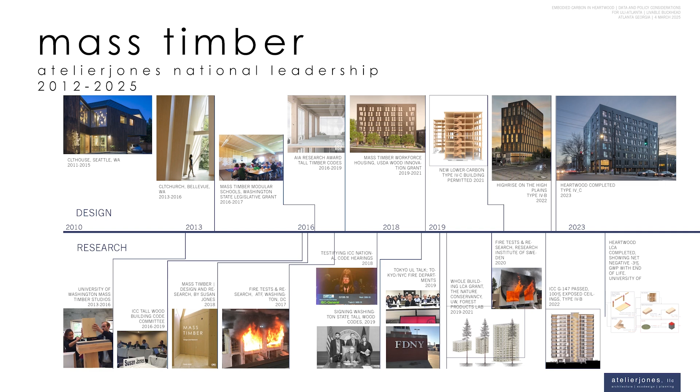Just do it. Building the house we'll talk a little about, in 2011, 12, 13, 14, starting design in '11, building the church, having opportunities, building Heartwood, and then the passion and the ability—craziness, really—to dive into a whole bunch of code changes, which is why I was tapped on the shoulder by AIA International in 2016. I'll talk a little more about that.

This parallel between design and research, building prototypes and then checking your work, has been all about the mark of practice of how people work. So that first prototype—my son there on the right side—was the CLT house.

I didn't know it at the time, but when we came online in 2015, our family lived there for 10 years. Our smaller family, since I have 20-somethings now, and one piece was in Atlanta for the Harris campaign—it was absolutely thrilling to be back here six months ago and be part of that, and then be here as well in a different time, in a different era.

But that family home was one of the first structures in the U.S. made out of cross-laminated timber. So we went out on a big limb.

I spent my own money, and as I told my group today, it cost us 8% more. It was $65,000 out of the total cost of the house. Those were choices I made personally for our family, as both architect, owner, and financer of this process. So that process really accelerated my learning about mass timber greatly in so many ways.

I can't tell you how doing it with your own hands—as an owner-developer, which you all know—really sharpens the learning curve very, very quickly. I'm really proud to say we didn't make any major mistakes, and we did have a couple of years of research going into it, with a lot of partners in that research.

But one of the things that was really exciting to me was the prefabrication. A fellow of ours was talking earlier about how technology has changed in architectural firms. I don't use Revit models myself—I'll show you some of that—but I've got a whole team of people who do them, and they're spectacular at it. Those Revit models have really fed into that prefabrication.

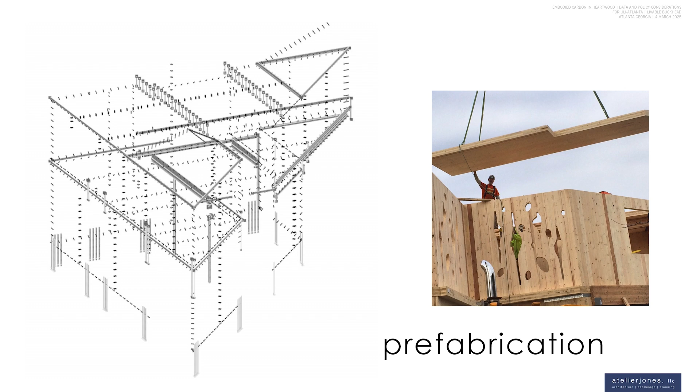Prefabrication works for many materials, but especially—that picture right there is actually the CLT panels we used for our house. They came delivered in little bags, all barcoded and numbered, so the contractor just had shop drawings for each panel at that place. It was pretty phenomenal to see that level of precision and accuracy.

They put up that mass timber in two weeks in the middle of a blustery windstorm and rain—the worst blustery part of December in about 10 years. So that was one lesson I learned: don't put the mass timber up in December.

But that was pretty obvious.

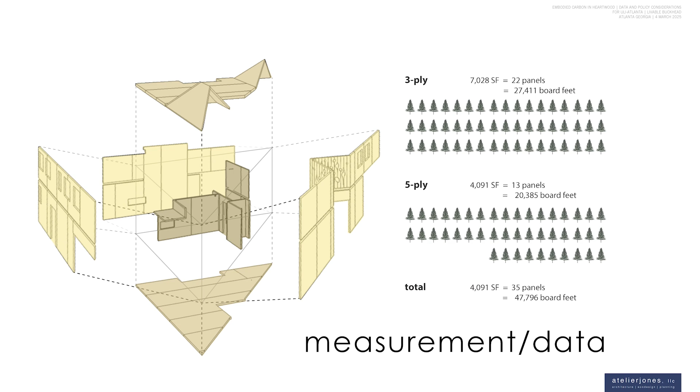It also taught me about how to measure your mass timber, how to measure your carbon, how to define carbon and understand it. It brought me into this whole dialogue that's happening right now here in Atlanta, and it's really exciting. With mass timber shop drawings, you can know the cubic meters, the cubic feet. You can measure that, translate it into board feet, which is a lumber term, and even translate that back to the trees and the acres they came from. That whole circular economy motion was really exciting to me, because architects will often ask: where do you get your materials? How do you source them? How do you specify them so they're lower carbon?

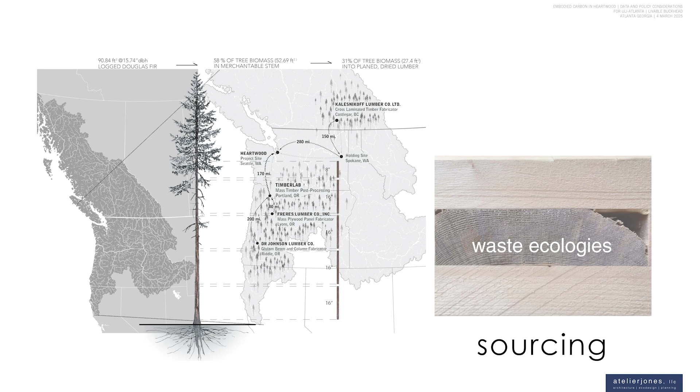And here I'm also being asked, well, how do I know that this actually helps forests? In the Pacific Northwest, there's a lot of social tension about whether we should cut trees down or not. The lumber industry lost the Northwestern timber wars in the 1990s, and a lot of mills were shut down. This is a very active discussion that affects people's families, lives, and jobs, and the health of all our forests, since we all share those values. Part of my question was: how can we think about using forests differently, so it can support rural economies while also encouraging the health of the forests? The dialogue about how healthy forests are so important, and what our role in that is, has been a really interesting part of this.

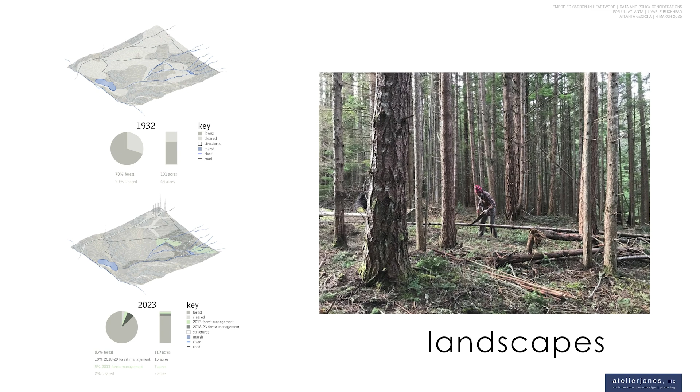This is my husband, I'm taking a picture. It's about 30 degrees up on top of the mountain here, where my grandfather's property is. We take this seriously, we're up there every month or so on top of Orcas, managing my own grandfather's forest, which had gone unmanaged for 6 years. We bring family and friends up there, and it's one of the healthiest things I've done, essentially giving them new life.

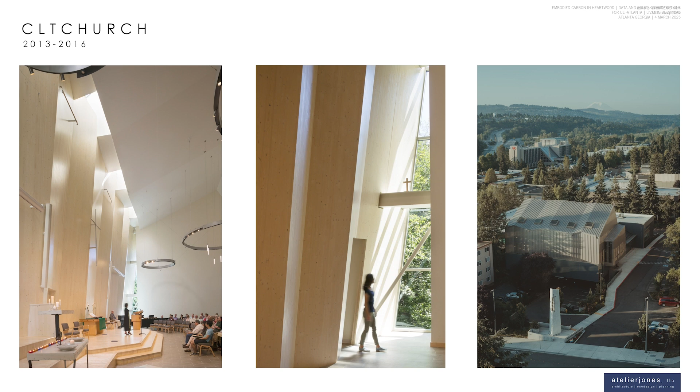Then we had a chance to build the CLT church, which isn't really made out of CLT - it's one wall, set against the sanctuary, structurally supported by steel. So I got to learn a lot about hybrid systems really fast, and this was a delightful project. Two different contractors worked on these projects; neither had done anything super structural before, so we just worked together and made it happen.

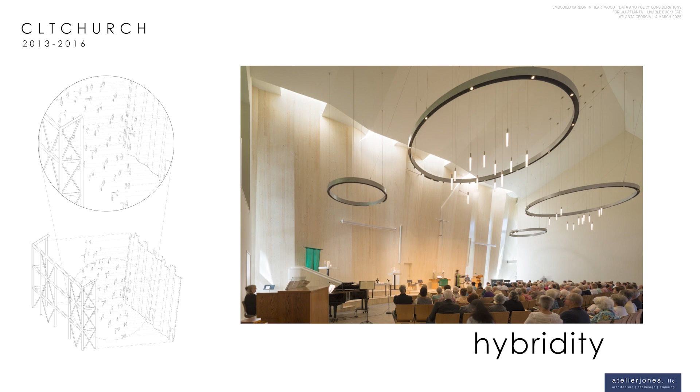In this particular project, the church, there wasn't necessarily an aligned group at first. I showed them renderings of what that wall would look like, and they said, 'Oh good, I think it's great, we'd like to be part of it.' So it was really the qualities of light and space that won them over. Here I also learned a lot about the custom steel needed for those 17 panels of that structure, with the steel seat panels at the front, and that was an interesting lesson in humility.

We weren't doing structural work you'd notice in the space - we were doing what you'd call decorative, because technically it wasn't structural. Say you need 40-foot high panels, 8 feet wide - you'd hardly think of them as powerful, but they were, and they were a key part of the program and the work.

So right around that time, around 2016, I got tapped on the shoulder by AIA National to join this code-writing committee. This really comes back to policy: how this community of architects, engineers, developers, and policymakers can really impact sustainable policy in positive ways. I knew that, but I was saying no to AIA, because I knew it would be a huge time sink and I wasn't being paid for it. I owned my own firm, a small business with 7 employees I worked with all the time, and it was an enormous decision - I said, I can't risk my practice.

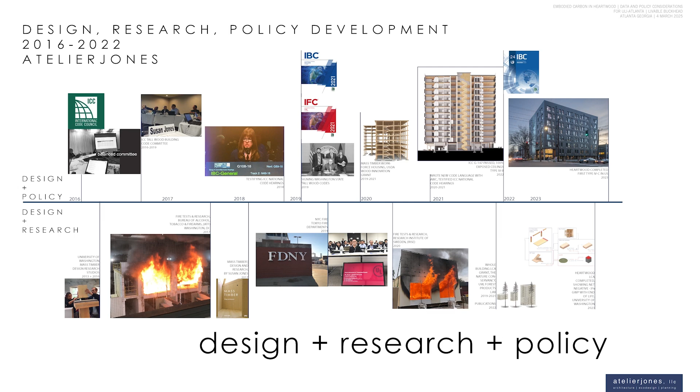Nevertheless, I did stay in the end, after they asked again and again and again. I agreed to go to at least one meeting. When I got back there, it was a little bit like some aspects of this - people on the committee saying mass timber isn't safe, it'll burn up in a fire. Meanwhile, the concrete and steel industries were sitting right there at the table, with their voices heard in a very balanced way.

They were strongly opposed to many of the things we were suggesting, and we had to prove it to them. But concrete is still easy—it was the fire guy. We tried sitting down some 6'9" fire chiefs of Columbus, Ohio, telling them how buildings are going to burn up.

You have to figure out how to break down those silos of knowledge, reach out, understand their perspective, and how they then create science and research, data-based, data-driven, to move to the next level.

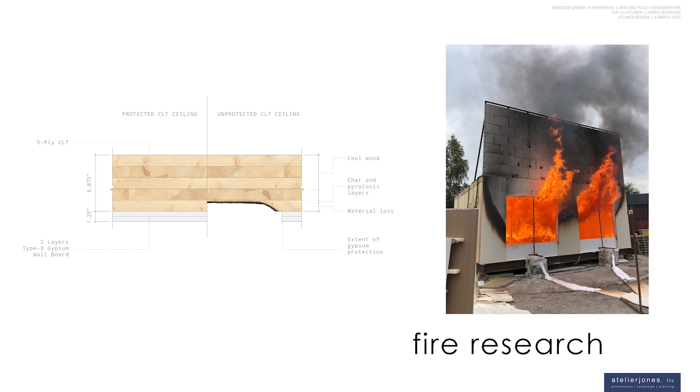And we did fire test after fire test. There were 5 in the Washington D.C. area, in Beltsville, at the Bureau of Alcohol, Tobacco and Firearms. Then in the next code cycle, we did 5 in Sweden, at an outdoor research facility shown here.

What we showed is, I hope you all know, that it's super safe. If you build a char layer in there—a char layer is the layer designed to disappear in a massive fire—then that fire disappears.

The structural layer behind it is preserved, and convinced the fire community of the code committee that this was indeed safe.

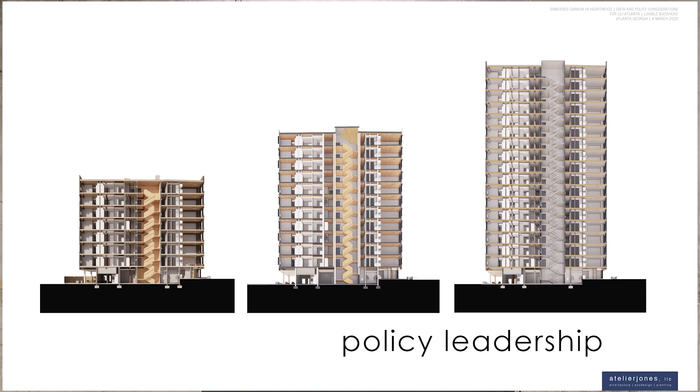So I'm going to talk a little bit about Heartwood now for the rest of this time. This is an 8-story building in Seattle, on Capitol Hill.

We were lucky enough, after finishing this huge amount of work in early January 2019, that I ended up writing a grant to the U.S. Forest Service to help implement one of these and bring it to a client. We brought that grant to a client in August of 2019 after we received it.

It was a small grant, but it was about $250,000, against a $40 million project cost, $28.5 million construction cost—a drop in the bucket to solve them.

But it allowed us to do that upfront, incredibly difficult work of doing a couple of different schemes and comparing costs at a conceptual level. You need not only the architect, you need the structural engineer—in our case, the acoustics engineer and the fire protection engineer—as well as the contractor at scale and the timber factory.

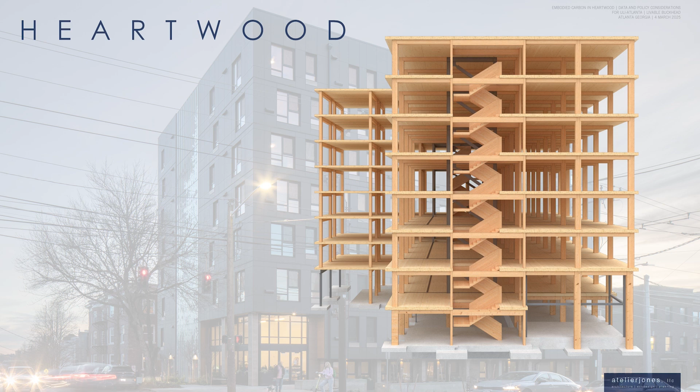Do I say we were cheaper? Do I say we were more expensive? I said similar costs. And when you're in concept design with good developers and your contractor, you know there's a long road ahead of you—so having similar costs at that point is good, compared to if it had come out wildly lopsided.

The project was 67,000 square feet—60,500 square feet, 126 units, 113 studios, 13 one-bedrooms. It was for a non-profit owner called Community Roots Housing, which typically specializes in affordable housing—60% of AMI, the area median income, and lower.

This project was brought in by an outside consultant working with the direct client as workforce housing. She was serving as an advisory board member because they had a lot of land but not enough people to execute these projects amid the frenzy happening in 2019. So she proposed waiving the developer fee, and said we'll do this workforce housing project, meaning we're going to test the system of LIHTC funding.

We're not going to go for housing. Without LIHTC, we're going to go 60 to 120% of AMI, which is still quite high in Seattle, as we've got a lot of influx of tech workers that bump up their AMI, area median income. That's a really key thing to consider.

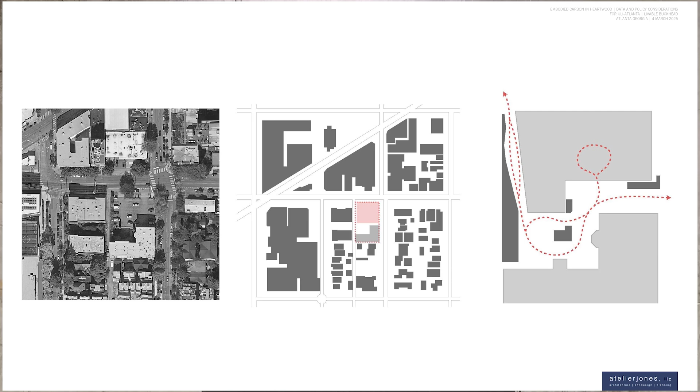So we came in with a lot of community meetings, a lot of outreach, a lot of caring, a lot of listening, and developed a courtyard in between that falls at the development lot line, which really tried to bring the communities together, the workforce housing community and the people that worked there. But they were on the same lot, so we did that lot boundary investment.

Our lot ended up being about 13,000 square feet with setbacks. The footprint is an 8,500 foot site, and we hope it's a very efficient building for most people. I actually needed to run those numbers - I think I ran them at 80%, 4 or 5% per floor, but these are small floor plates at 8,500 square feet, that's 17 units per floor. The ground floor doesn't have a lot of amenities - the amenities are outdoor courtyards and where its location is.

So you all talked about amenities, how important they are in relationship to the neighborhood. We live in this at the height of Capitol Hill - everything's walkable, there's no parking required, and really no parking needed in this particular site. Seattle has very good transit and bus systems, and it's extraordinarily walkable.

I did look at this - it was walkable. I walked over here from the Kimpton Hotel, it took me 20 minutes. I had to walk home on Peachtree Road, about 10 minutes - it was a little bit too painful, but not too bad. The fresh air kind of tried to wake me up a little bit. But walkability is a really key thing, and that's another aspect of what you all are doing in Buckhead - you need it to be intentionally walkable to something.

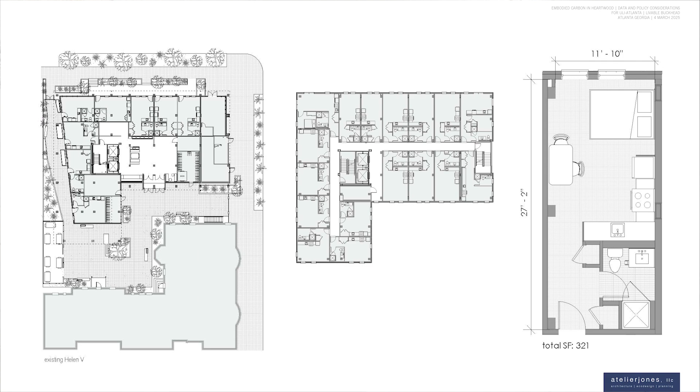It's a simple shaped core with the structure, the steel braced frames - buckling restrained brace frames, I think I got that right. Thank you, structural engineers. It was a steel system that was also pretty compact. There's also another lateral brace down the hall, so we made our hallways small and efficient, and kept our common spaces quite reasonable.

This is a picture of the structural system with the lateral bracing in between, and all of the steel is shown in that black and white drawing. All the wood is on the right hand side with the brace frame placed up. You can also see what we did, and I'll show you some pictures later with the deck.

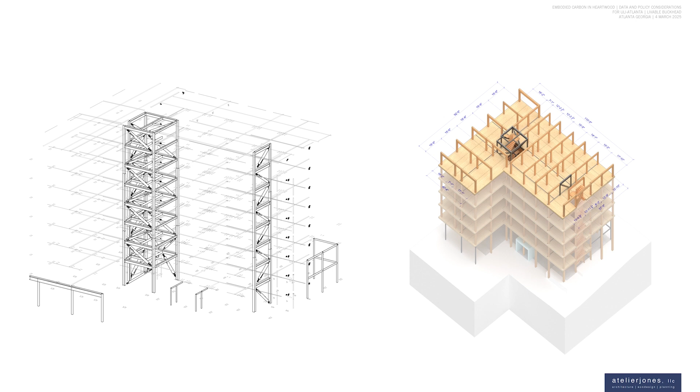I'll show you some evidence of that in new construction. These are some renderings that our office did on the left, and then the final on the right. As for the structural grid, we did not have a single structural grid.

We had a 12-foot-2 grid and an 18-foot-8 grid, and the reason is because we weren't designing to the optimal structural grid for the structural engineer. We were designing to the pro forma, and our pro forma told us that we needed more units.

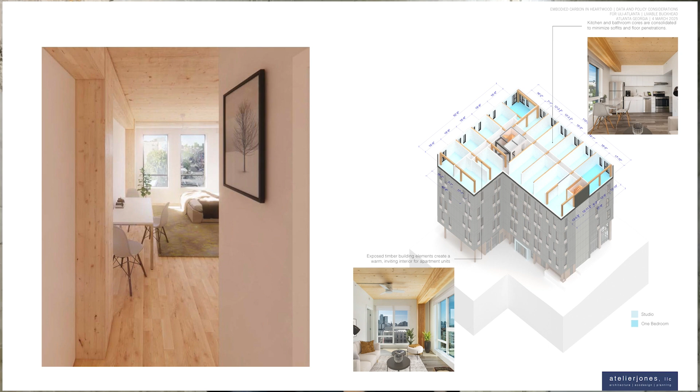The more units we got, we put the trash underground, we put the electrical transformer underground, and we fit in as many units as possible. We had a very small site, and we designed that capability to work with the system. That was what really made it work.

As the pro forma told us in the first week, this was not enough. We needed 115 units - okay, we got it right. Oh, we need 6 more. Okay, we got 121, we'll need 5 more. 126, okay. That was the kind of attitude of the project, knowing that Mass Timber is difficult.

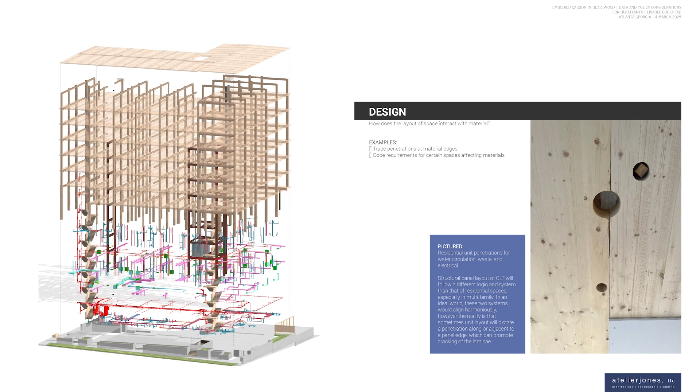I mentioned this a little bit about the BIM coordination model - this is from the individual in our office. It's not a Revit model, but the excitement about moving all of these things together in our hands was very extraordinary. I was able to use that BIM coordination.

You could see the holes on the right-hand side there and how those vertical systems went into place. All of those holes, all those panels, were drawn in place beforehand.

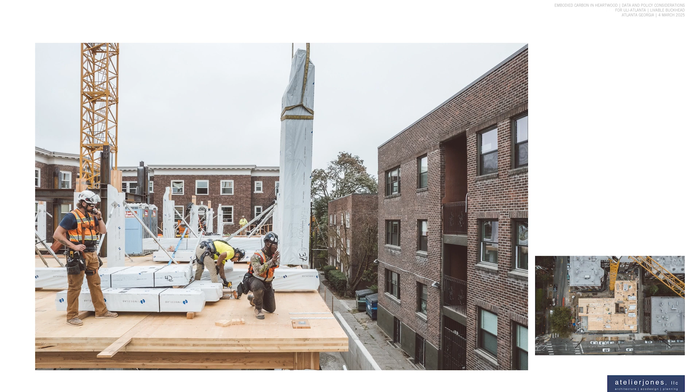Under construction, what does a tight site do for you? You've got a really tight one here, and we had just-in-time delivery. There was a little swath of a place where a flatbed truck could come up and put that timber down.

The timber went up before - it was frankly the easiest thing about the job. The tight site was a challenge. You can see the crane in the background, in that courtyard.

We had to have everybody out of the brick building when we were taking it down, in case there was some kind of a tragic accident. So we had to move 37 households out of their brick building homes in one weekend. Not a real fun thing for people to afford, but it was necessary because of the urban qualities of the site.

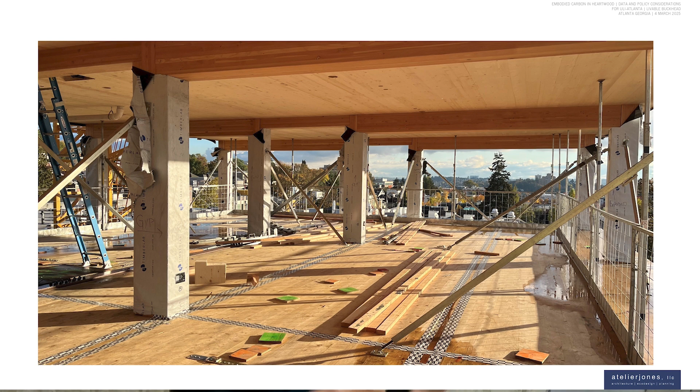You might notice the beams aren't quite in sync, and that's because we're trying to be most efficient with the fire dividing walls that go in between units, but we didn't really care that much. This was a design concession I made between how deep the beams were in one unit versus another, because people aren't going to go back and forth.

We were able to save some dollars there, and save some fiber as well in that piece of the process.

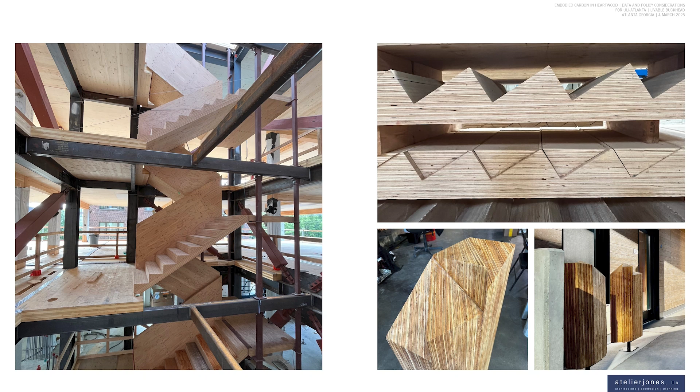There's a picture of the core going up. We were using Mass Plywood Panel stairs because of their strength - we had a stringer that went from floor to floor, and another stringer from floor to floor.

On the right-hand side, you could see in the CNC factory - Timberlab in Portland - how that CNC cutter just cuts out those treads. That's a fabulous thing because you're able to create these art pieces down over the pedestrian walkway areas with the MPP stairs and the stair treads.

We were able to use that waste again. Those stair treads went up simultaneously with the core, simultaneously with the steel, and simultaneously with the broader Mass Timber columns across the stair floors.

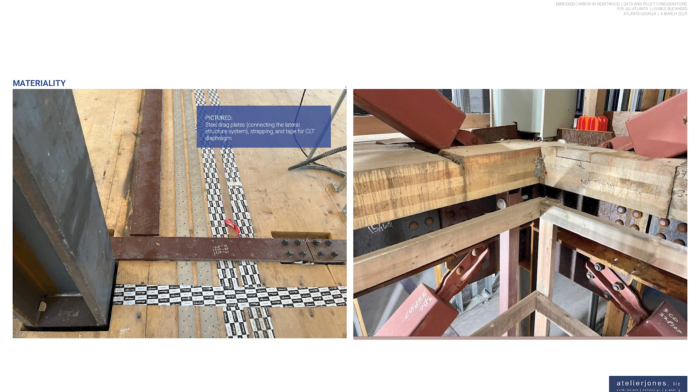Here's some pictures of how it all came together, and it wasn't easy. The hardest part was getting the steel tab in underneath the BRBS and attaching it to the top of the slab, while at the same time the next CLT slab was going on. There were some sequencing issues our team learned from, but the coming together of steel and CLT was a learning proposition, and we got better at it.

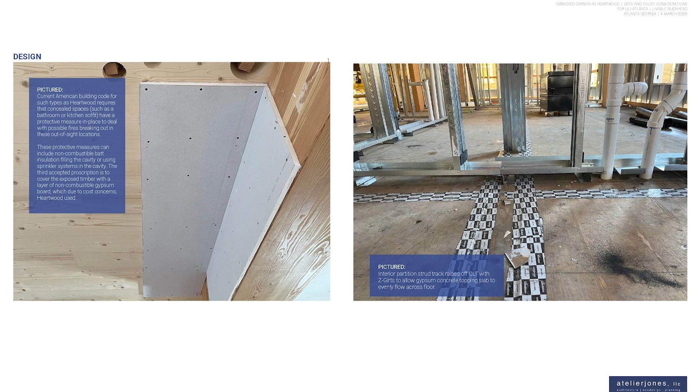So it's just a low-tech film and some gypsum wallboard and sound-deadening. As an architect, it also made sure we kept the reflected ceiling plans and sprinkling plans as minimal as possible. At the very beginning, we were drawing the RCPs eight weeks into the feasibility study because of the impact of things like this.

It hit a very difficult leasing point, where instead of the frothy residential market we had pre-COVID, and then the different frothy thing during COVID, there was a huge buildup of multifamily units. We had 15,000 market rate units coming online around the time our project was coming online, about twice as many as we'd probably see in one normal year. So we didn't lease up as fast as I expected, being candid here, but it's now 90% leased, and it will move on to its next phase, so that's a good thing.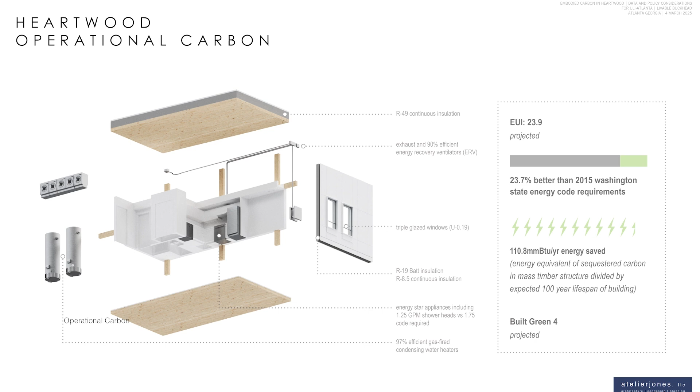Okay, so now we get to the embodied carbon. As I mentioned, you can measure this, and we can all measure this better now because you have the AIA office with architects. So we can measure the steel, we can measure the slab-on-grade concrete foundation, and we can measure all the mass timber.

So the total was about 1,000 cubic meters of wood relative to, I think, 250 cubic meters of concrete—so four times the amount of wood, but one time the amount of concrete. We built up out of the ground because we wanted to use less concrete, but we had to do parking, so we were pushed into that. Steel was quite low, about 15 cubic meters. Of course steel is heavier, but it's not as much volume. So it was about a 1-to-4-to-0.5 ratio.

So measuring is the first key. And then we also designed around this idea of low carbon—design is a powerful tool also. Taking all the steel connectors out of that two-hour wood joint that was required was an amazing thing that we did. It turned out to be rather easy.

The hardest part was getting the city officials to rate this as a two-hour joint, because that was required for eight stories. So we had to introduce this intumescent tape placed in the joint itself, and convince the city—which has the authority to say whether a solution actually meets code—that this solution worked, essentially creating policy through research during a building project.

Once they saw it, they recognized this huge tradition of heavy timber warehouse buildings down by the water that have been standing for 150 years. We love those buildings, office and ground floor, and the tech companies love those buildings too. So this is bringing that technology back to the future - showing that these buildings lasted 120 years, and ours are laminated, so they don't even read as heavy timber, but because of that glulam lamination, it's a much stiffer building.

So it was relatively easy to push that estimate - the appraisal started out conservative at 100 years, which I really believe is conservative.

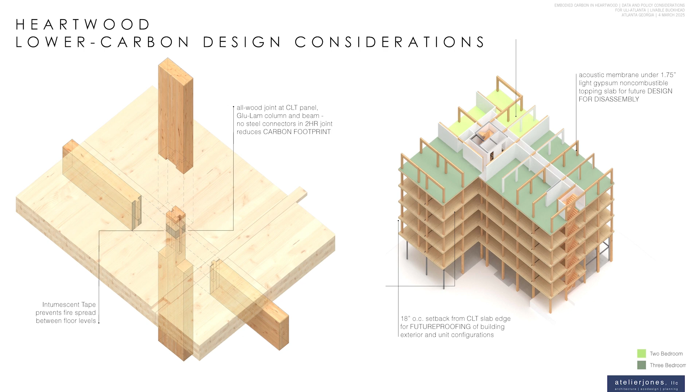We also wanted to make sure we configured this building properly - we set the columns up about 18 inches from the slab edge away from the water edge. The water will live on this facade edge where they have a really cheap fiber cement siding, and we set the columns away from that, along with the kitchens, to prevent any sort of leakage and damage over decades from water.

I mentioned before these are sustainably harvested from forests that we know well in our region. I'm also bringing this up to remind you all - you have sustainable forests in your region too. You have a glulam plant in Dothan, Alabama - I looked it up on my phone, it's 192 miles from downtown Atlanta. I'd really encourage you to go visit that manufacturer and see what they're doing.

Timber Lab is the post-processor we used also - they have a sister company in Portland, Oregon. They take the glulam columns and CLT panels and cut them precisely to land on site perfectly, according to the shop drawings.

We had to do an LCA as part of the U.S. Forest Service requirements, so we'd set money aside for this - that's how it was funded. We brought experts in, and I think the LCA technology has gotten even better since we did our LCA in 2023, using the software that's out there. One Click is kind of taking over the world, EC3 is always a good one, and then Tally as well.

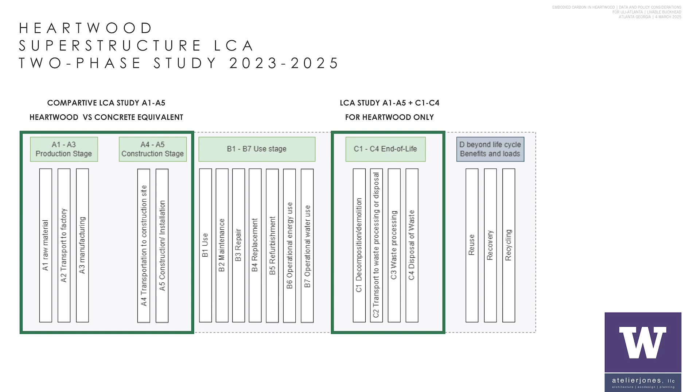This LCA that I'm about to show you went through the A1 through A5 stages, but it also included the C1 through C4 end-of-life work. That was a big deal for us because, as far as we know, that hadn't really been quantified in many ways. We also did a comparative LCA, which was one of the critical requirements by the Carbon Leadership Forum.

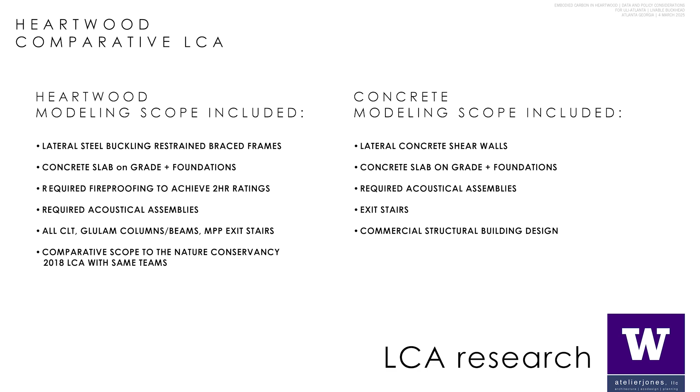They said it's great to do what you do, but let's do baseline as well. Because it was a grant and this wasn't inexpensive, we were able to model the superstructure for a concrete building using post-tension slabs - a commercial structural building design, done by our structural engineer who had a vested interest in showing how they could produce commercially efficient structural concrete buildings. So we had two models, and that was the basis for the big slab.

Going forward I won't get into all the details on the left, but the big picture is the green and the gray in the middle. If you ask how much carbon did it take to design and build that concrete building - that was our baseline. That 100% was literally what we got out of that model for the GWP, global warming potential, from that concrete baseline model we modeled separately.

Then we also modeled in parallel the Heartwood building, and we had a difference of 38% for the superstructure of the building. We included the foundations, the column beam structure, the core, and all the extra fireproofing details like the gypsum wallboard needed per code that I helped write. We also included all the lateral systems, input systems included. We were as equivalent as possible in that comparison.

What we didn't include was the functionally equivalent stuff around the edges - interior design, facade, windows - because in our plans that's going to be the same for concrete as it is for mass timber embodied carbon.

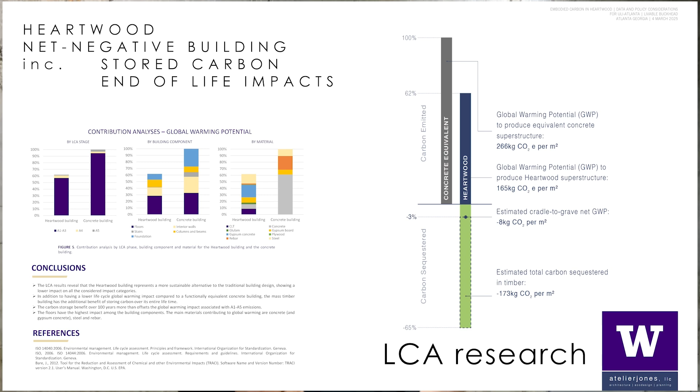And you're talking about the number at that dotted line - minus 3%. So I like to say it's at that negative delta. It's not a lot, right? Negative 3% isn't that much, but it is something. The most important thing for all of us is to be as clear as possible - we're trying to be transparent about it and just open about it. Because 3%, net negative, that's cool - that's pretty amazing.

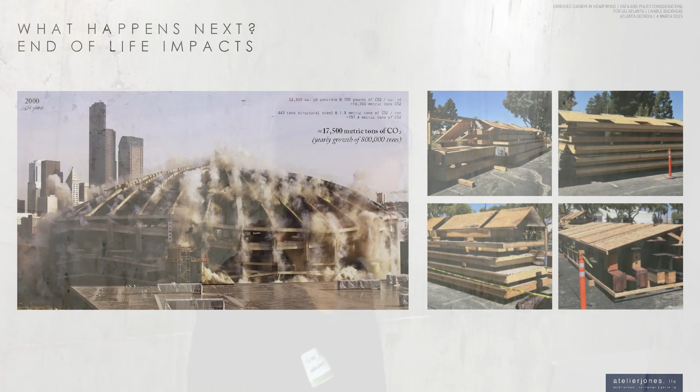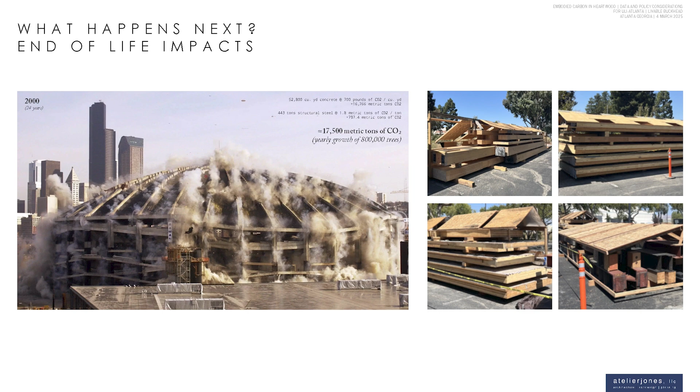And then after 200 years, our researchers told us we could grind up all that wood and make particle board, and it lasts for 40 years, and we can do it again for 40 years, and again for 40 years. So you add up the 100 for the first building, the 100 for the second building, and all the particle board recycles of 40 for 120 years. You get 320 years that building lasts.

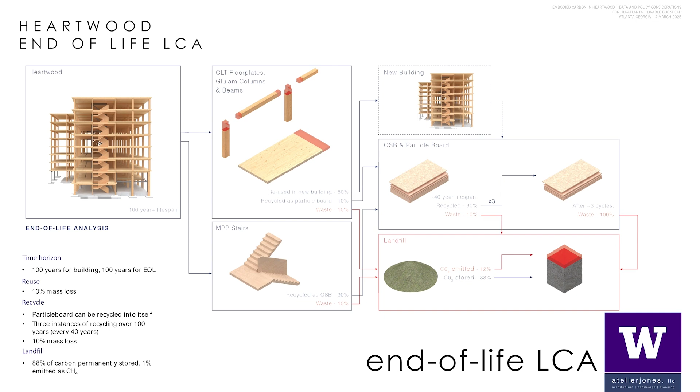So this was our LCA analysis, our assumptions, and we really encourage more and more study on that, and more challenge on that, more transparency.

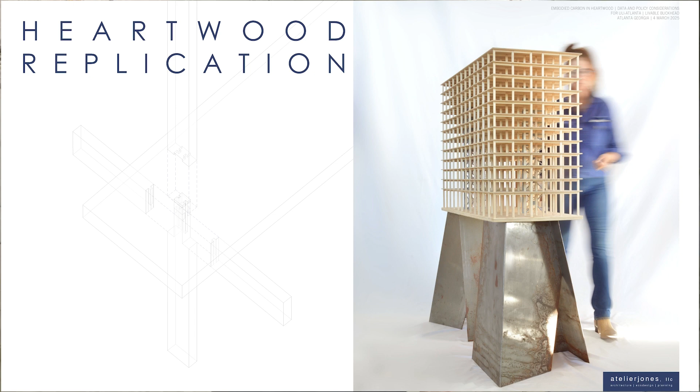So this is really what's interesting to me about this Buckhead conversation - really trying to brand a number of buildings using similar variations of this type. Whether that's student housing for temporary, or luxury housing for folks, or affordable housing for your population, it can work in many of these regions, with and without parking. It's a replicable design, and that's really exciting.

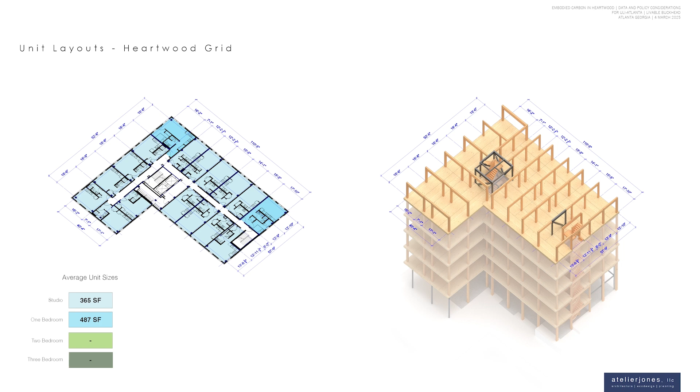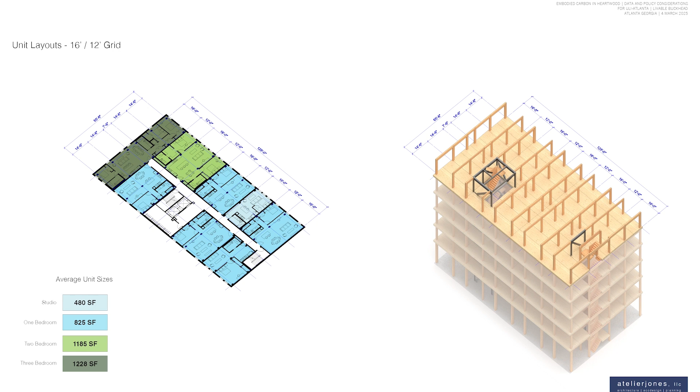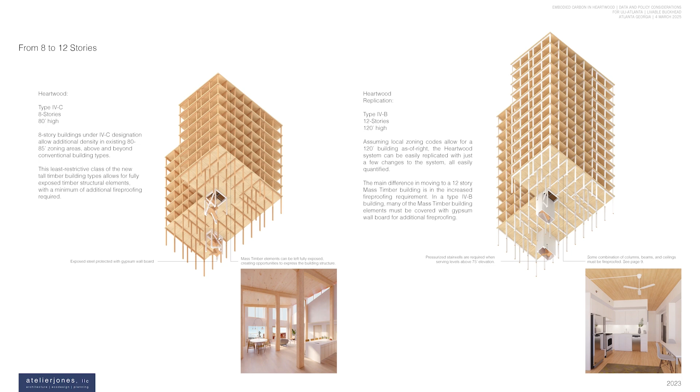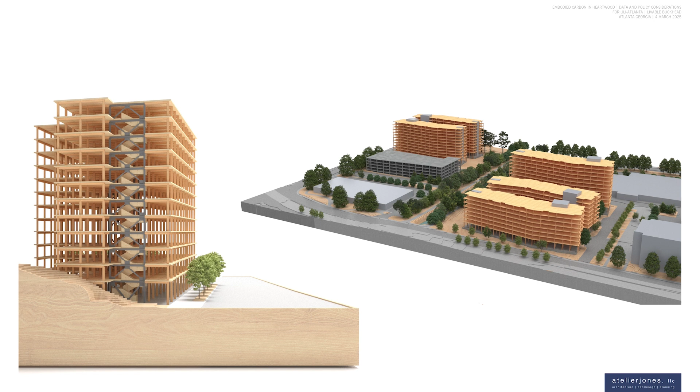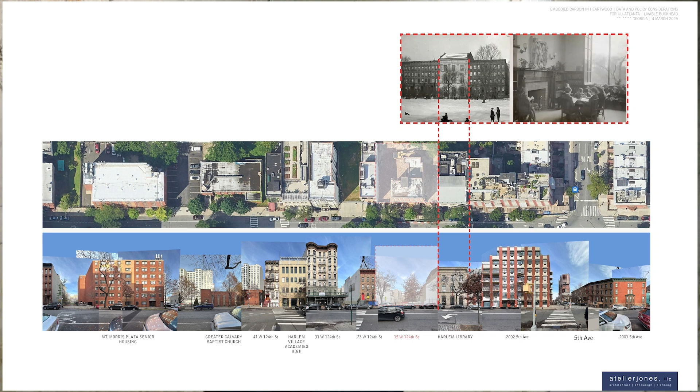So I'm just going to do quickly a couple of slides on another LCA process that we were able to work with the city of New York on - their economic development, on a blank site in Harlem. We were invited to be part of the grant program Mass Timber Accelerator, which was willing to advance their policy goals, New York City's policy goals, along the Green Economy Action Plan, specifically to decarbonize construction. They had a long and detailed policy memo, and they created a studio where they gave a number of teams $25,000 for a feasibility study. We were able to participate with a wonderful owner, Michael Dwyer of Magna & York Development.

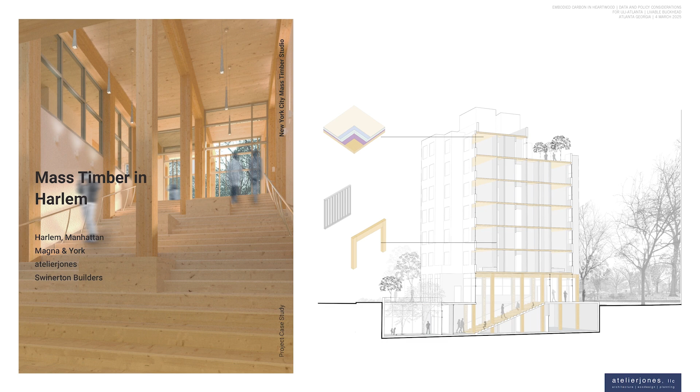He had a concrete building designed and it was about to go into the next stage of permitting and design development, and he stopped. It was like he knew timber buildings could be done, could be used, and he just felt like he needed to have something that reflected his values. So as part of his studio, he asked us to replace their concrete slabs with mass timber, and many of the concrete columns too, and we did that.

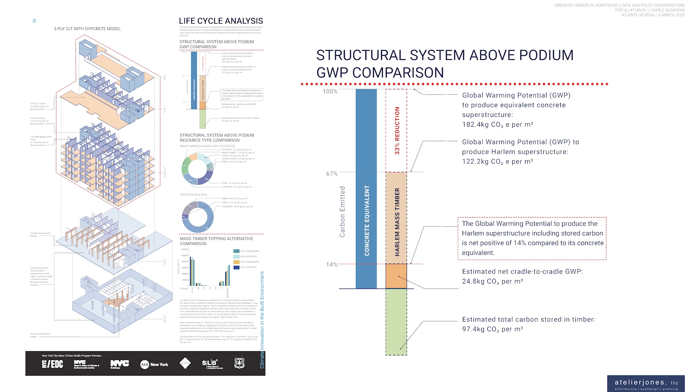And then we did a comparative structural system LCA, and found it was a 33% reduction between concrete and mass timber for this new scheme. Again, not counting the mass stored carbon, which then bumped it up to plus 14. But it's not net neutral in this case - it is approximately 86% less carbon-emitted structural system than that concrete building. So with that, I'm going to end the appendix.